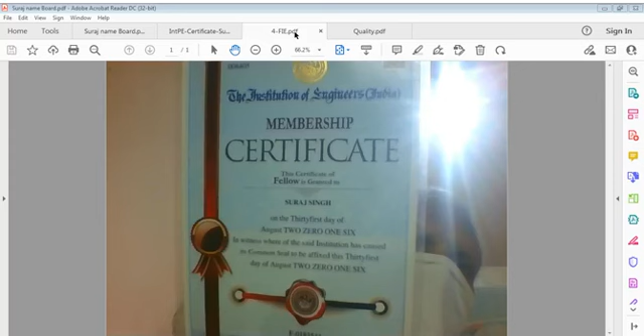Now it is about quality, about communication and coordination, which I usually talk of, because for me communication and coordination is very significant. It is very important to me that communication or coordination happens properly. We should be very concerned about communication and coordination issues everywhere, particularly in our professional domain.

I did not know what coordination was before, when I was young. The real meaning of coordination was not understood, though we used to do that. Nobody taught us about it. In our education system it was not included, but it is not necessary that it should be included, because the education system is well measured. Syllabus and program of education are well settled, you cannot expand or shorten them, because you have to learn the basics of education first, basic subjects.

Even in engineering, you do not become an engineer after passing your examination. Do we call this person an engineer? Of course, by education, by academics, one becomes an engineer, but it is dependent on engineering. You have to learn actually for a couple of years before that you become an engineer. In fact, you gain confidence, and to earn that confidence you have to work in the field.

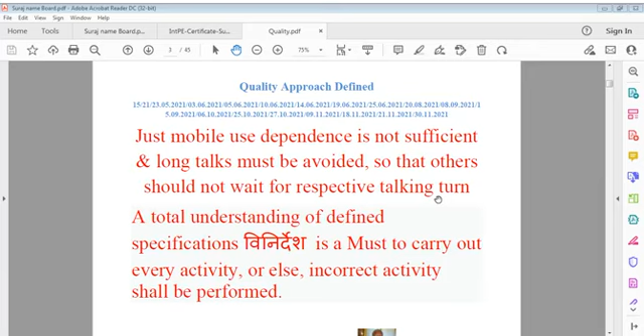We design specifications, we design systems, we design structures, and we design so much. Some people don't want to call them design, they want to call them specifications or something else. No problem - specification is also a part of design. Contract too is a part of design. Contract conditions too are part of designs. These are not ordinary designs, these are non-structural designs.

These designs move projects. If you don't have specifications, if you don't have contracts, we cannot move the project. That is also true, and moving a project is very significant, very paramount important. We can say technical activity cannot be done by talks. Technical activities cannot be done by signatures. Technical activity is done successfully and confirmed by real work.

This means if I learn something in my university, it must be done practically. And doing it practically is quite different than what I learned in the field. Therefore, quality can be defined completely differently. What was told, what was learned is not the same as what I do, because when we do something, we are exposed to the reality of work, the reality of organization, the reality of actual work.

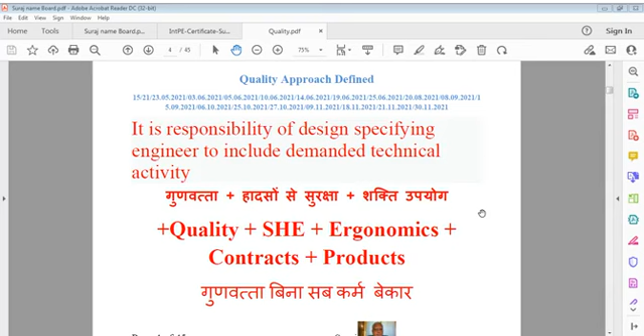And those may be linked to professional engineering or they may not be linked to professional engineering. Unfortunately, writing skill is not developed in our education. Coordination is not known - what is coordination? It does not coordinate, I'm not criticizing anyone. No need - when you work in the field, you shall know what coordination is. If you do not know coordination, if you do not conduct anything about communication, then you won't be a successful engineer. You cannot stay anywhere.

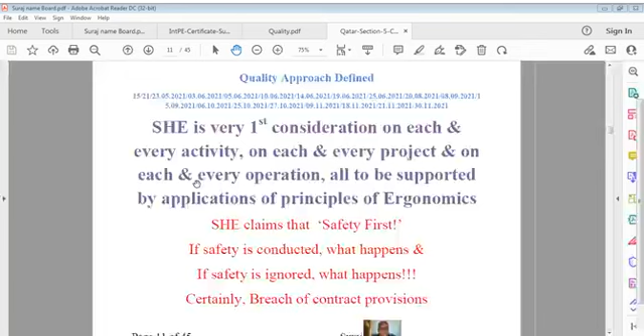In engineering, particularly in civil engineering, we all know that concrete is a prime element, a prime material. Without concrete material, generally we cannot survive. Concrete has become that part of our life that if concrete doesn't exist, our construction has got no meaning. It may be RCC construction, or structural steel, or pre-stressed concrete, whatever we can say, concrete is required in all works.

I discussed about it long back, and yesterday also I tried some pages. Concrete, you can say, is very much part of a contract, a very smart part, a very active part in every contract, in every project. And you can say a major part of every work, every project is concrete, because it is the body, it is the structure, the concrete structure we can say.

And if concrete fails, if your structure fails, every other part, every other content, every other article, every other material that is put on the structure goes away. If there is a failure in the structure, whatever you have put on that in form of finishes, in form of flooring, in form of walling, all those go away.

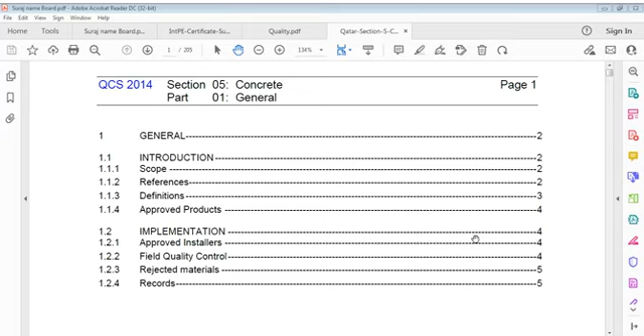Concrete is concrete, and therefore I want to share with you, as I shared before, why I consider this. This is not my document, this is not my print, this is another publication from another state. I have this copy, that's why I'm referring to it. I don't say that you must use this, maybe you have your own, but only for contents I try to project it, because it's better if you understand that.

In this, let's say, means it's a general part, and this is here. I will only give some brief, I'm not going to take at length. I have to do contracting, I have to do contract arbitration. We have many issues we have to discuss.

We have to discuss what is contract and what is arbitration, and why there is arbitration, or why there are disputes, what is the reason for that, where there are lapses on contracts, why there are lapses, why contracts are not clear. Because contract means agreement, and why there is error in agreement, why don't we understand what is fact and what is not fact.

Contract we generally don't consider our subject, but I think contract is much more a subject of engineering than some of the other fields. If there's no good contract, there's no good execution, no good work, no good design. So contracts are part of life, and it may not be taught well in our ordinary education, or it may be taught well, but we did not care, because it's very boring.

There's no mathematics in that. It's the fact that, just like mathematics, that's what I understand. Mathematics, formula, physics, or chemistry - likewise, we are full of this use of formula. We just apply formula and get answer. That's what we think is engineering design.

But I think contract, and how to operate contract, how to do contract - these are well related in construction engineering, at least. There is a contract, but contract doesn't mean contract only, it means all supporting documents, all structured documents. In contract there are so many documents, that's why I take this in title - Red, Silver, White.

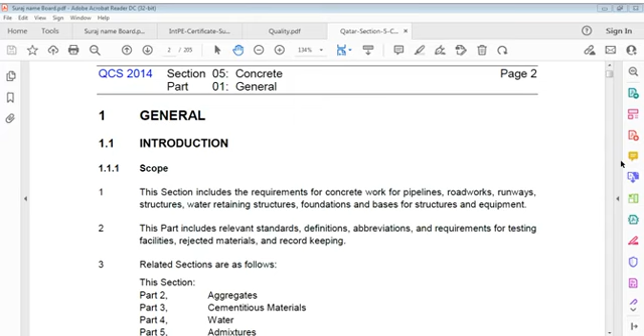And in this we say we have aggregates.

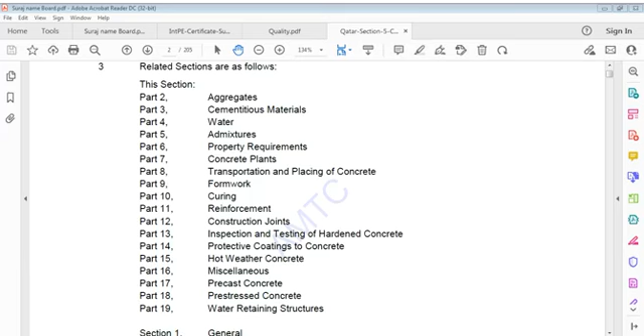Sections in this include general requirements, and of course quality requirements and controls, and of course structures, that's foundations and retaining structures, or road work, which is a different world, then drainage work, and some mechanical and electrical equipment.

And then we have some references from the American Society of Testing Material, that is standard practice for curing concrete, making and curing concrete test specimens, and of course method for compressive strength of cylindrical concrete specimens, and then test method for slump of hydraulic cement concrete and temperature of freshly mixed hydraulic cement.

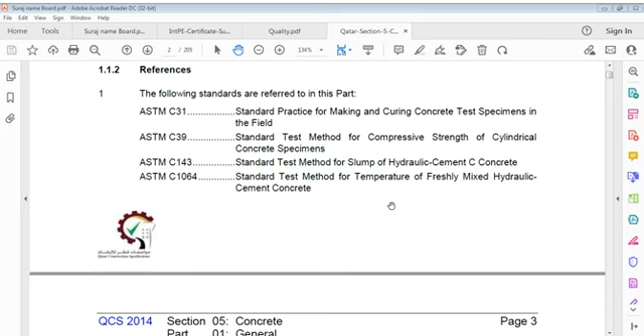All this, and civil engineering terms, some terms of glossary of buildings. We have to care about that.

Then test for general properties of aggregate, methods for sampling, and test for general properties of aggregates, methods for reducing laboratory samples. Then we have method of sampling fresh concrete on site. Then we have testing fresh concrete, that is slump test, shape, dimensions, and other requirements.

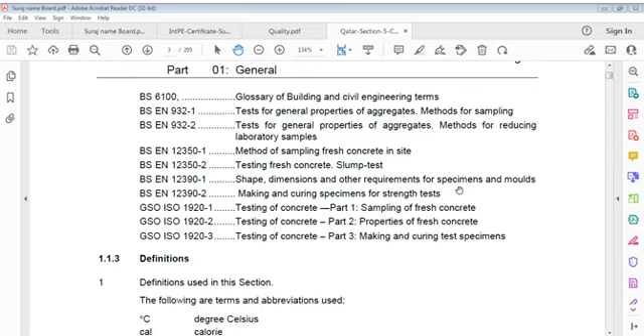Shape, dimensions, and the requirements. Of course we then have making and curing specimens for strength tests, and of course testing of concrete part 1, that's sampling of fresh concrete. Testing of concrete part 2 is properties of fresh concrete, and testing of concrete part 3 is making and curing test specimens. These are some from European codes, ISO, and some from British standards likewise.

You can see we have it like that. And then we have certain definitions of symbols, and these are very common. You know what this is.

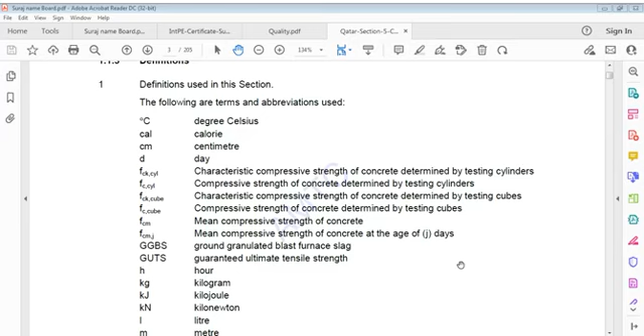For example, degree Celsius is degree Celsius degree, then cal is calorie, cm is centimeter, D is day, and FCK is cylinder, which clearly indicates compressive strength, that's characteristic compressive strength of concrete determined by testing cylinders, because cylinder is written there. Same way, FC CYL is compressive strength of concrete determined by testing cylinders. Then FCK simply says characteristic compressive strength of concrete determined by testing cubes. So basically, characteristic strength means of a cube.

And we can say FC cube is compressive strength of concrete determined by testing cubes, and of course FCM means compressive strength of concrete. Same way, FCK cube is characteristic compressive strength of concrete determined by testing cubes, and same way compressive strength of concrete determined by testing cubes. FCM means mean compressive strength of concrete, and FCM with J means compressive strength of concrete at the age of J days.

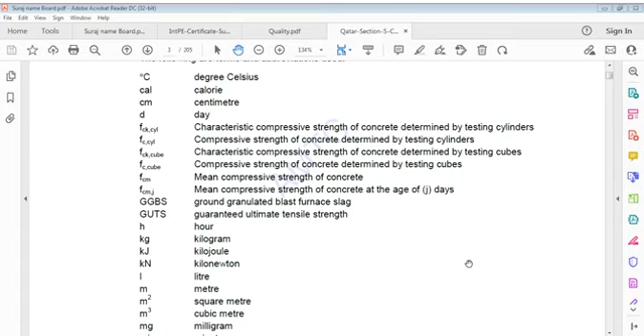And yes, you can also say here that GGBS is granulated blast furnace slag, and GUTS is guaranteed ultimate tensile strength.

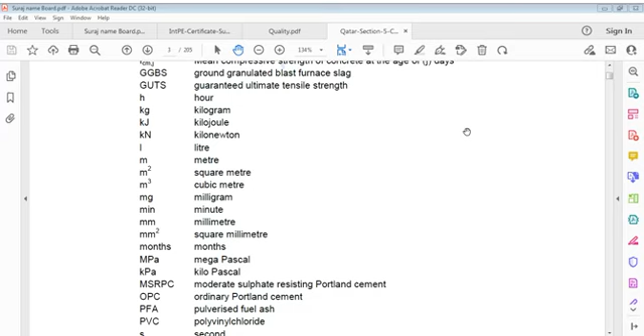H stands for hour, kg stands for kilogram, kJ stands for kilojoules, kN stands for kilonewton, L stands for liter, m stands for meter, m square stands for square meter, m cube is cubic meter, mg is milligram, min is minute, mm is millimeter, months is months, MPa is megapascal, and kPa is kilopascal. MSRPC means moderate sulfate resisting Portland cement, OPC is ordinary Portland cement, PFA is pulverized fuel ash, and PVC is polyvinyl chloride.

S is equal to second, SF is equal to silica fumes, SRPC is sulfate resisting Portland cement, ton is 1000 kilogram as everybody knows, ppm is part per million, micron is 10 to the power minus 6 meter, and micrometer is also 10 to the power minus 6 meter.

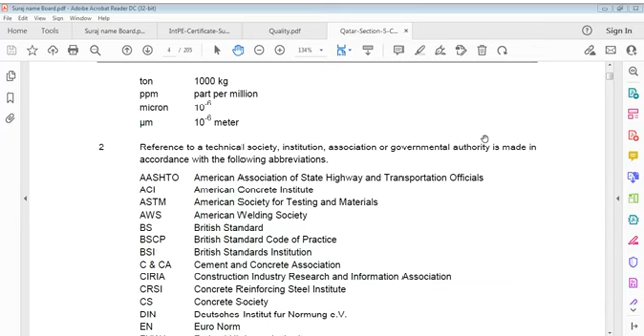In that case, we go to reference to technical society, institutions, associations, or government authority. These are only for information, I'm not saying we have to remember them. AASHTO is American Association of State Highway and Transportation Officials.

They have American Welding Society, AWS, as well as BS, the British Standard, and BSCP, British Standard Code of Practice. Likewise, we have so many others.

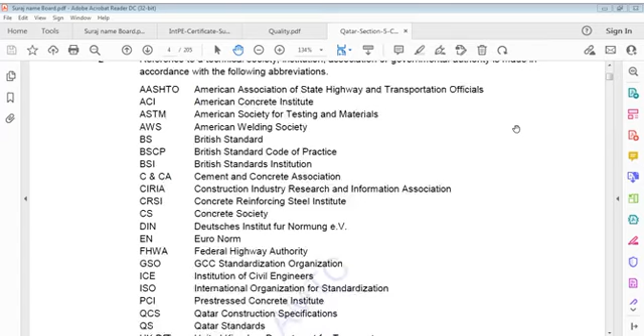We have C&CA, that is Cement and Concrete Association. CIRIA, that's very famous, is Construction Industry Research and Information Association.

Then we have Concrete Reinforcing Steel Institute, CRSI, and CS, Concrete Society.

EN is Euro norm, and FHWA is Federal Highway Authority. GSO is the GCC Standardization Organization, and GCC is Gulf Cooperation Council, the Gulf Countries Council. ICE is Institution of Civil Engineers, and ISO is International Organization for Standardization.

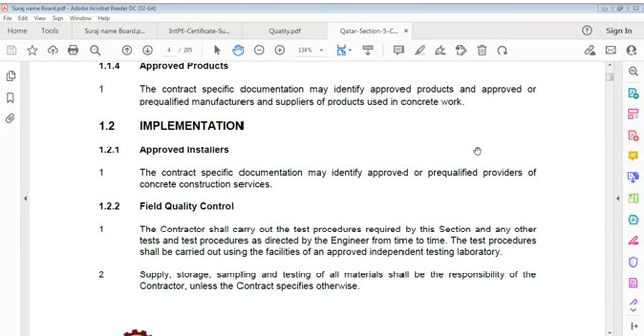Field quality control: contractors shall carry out test procedures required by this section and whatever other tests and test procedures as directed by the engineer from time to time. Test procedures shall be carried out using facilities of an approved independent testing laboratory.

So contractors shall carry out test procedures required by this section and whatever other tests and test procedures as directed by engineer from time to time. Test procedures shall be carried out using facilities of an approved independent testing laboratory.

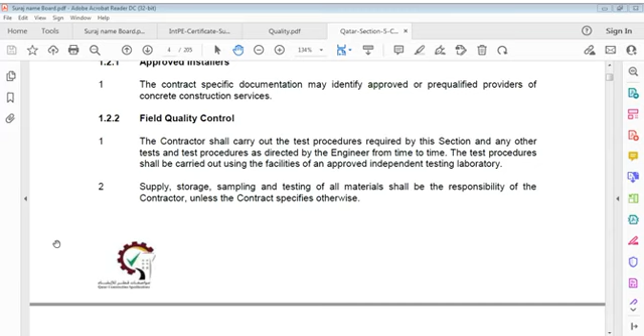The engineer can also require the contractor to take samples of materials and deliver them to the Central Materials Laboratory for additional tests to be carried out by the employer. Sampling procedures shall be in accordance with BS EN 932 or relevant ASTM standards, and sample sizes shall conform to the requirements shown in table 1.1.

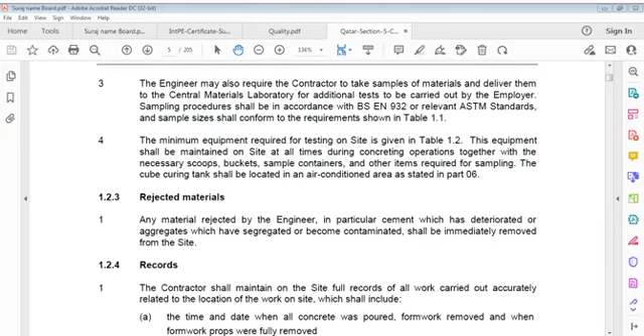Sample sizes shall conform to requirements. What is required? Material, sampling procedure, test, and minimum sample size. The materials are cement, aggregate, reinforcement, and water.

For cement, the test is full range of tests, and the sample is 7 kilogram, which should be taken from 12 bags, for the full range of tests.

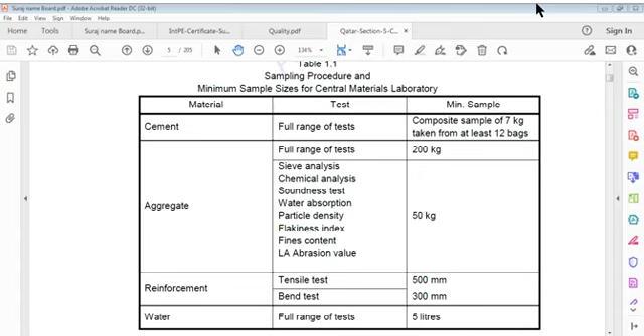We have aggregate, both aggregates, and for this we take samples of 200 kilogram. Out of this 200 kilogram, we have to conduct sieve analysis, chemical analysis, soundness test, and water absorption. These are very important tests: sieve analysis, chemical analysis, soundness test, water absorption test, particle density, flakiness index, fines content, and Los Angeles abrasion value.

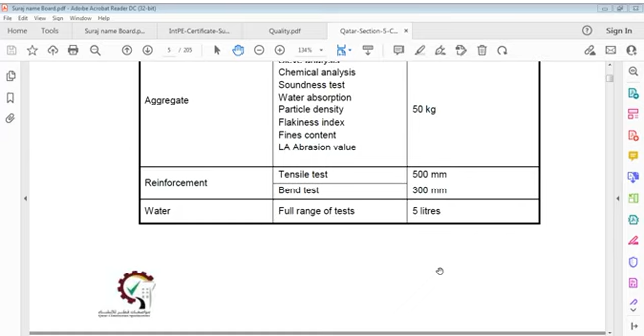Equipment, the minimum equipment required for testing on site, is given in the table.

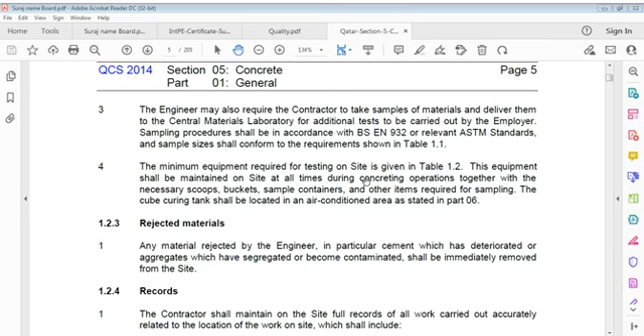Here we have the sampling procedure. In accordance with this, the engineer may also require the contractor to take samples of materials and deliver them to a central laboratory for additional tests to be carried out by the employer. Sampling procedure shall be in accordance with BS EN 932 or relevant ASTM standards, and sample sizes shall conform to the requirements in Table 1.1.

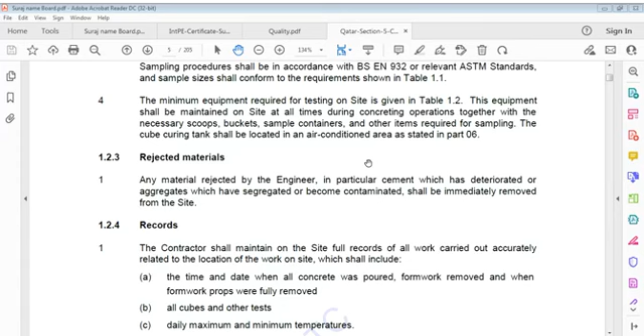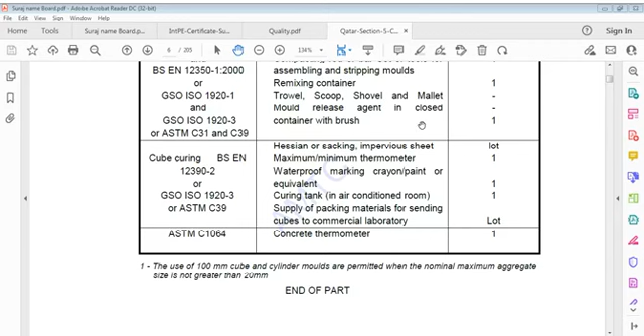And then we have the curing tank, supply of packing material for sending cubes to the commercial laboratory, and concrete thermometer.

Then we move to aggregates, and what we actually need to cover: general scope, references, definitions, source approval, sampling, quality and testing, storage at contractor's place, plant, fine aggregate for concrete and mortar, coarse aggregate for concrete, combined aggregate for concrete, washing and processing, lightweight aggregates, and coarse recycled aggregates.

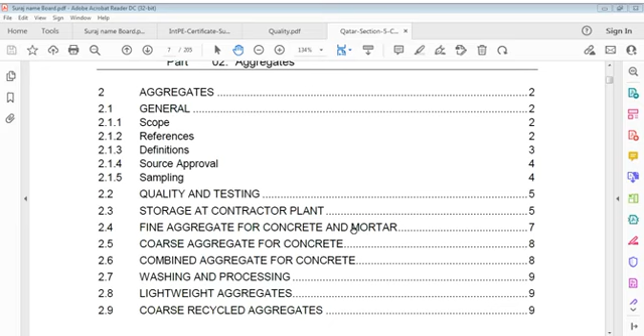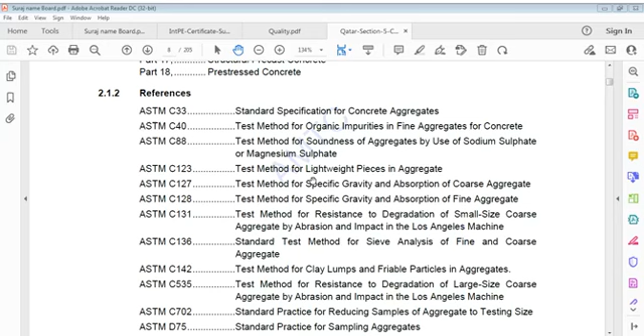Then test method for lightweight pieces in aggregate. And then test method for specific gravity and absorption of coarse aggregate. We can say specific gravity. Then test method for sieve analysis, or resistance to degradation of small size coarse aggregate by abrasion and impact in the Los Angeles machine. That's very important: resistance to degradation of small size coarse aggregate by abrasion and impact in the Los Angeles machine.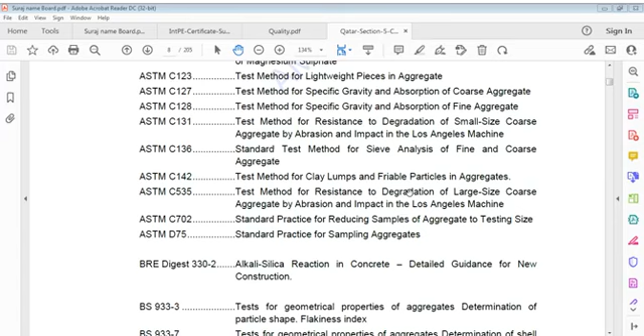When we are talking of tests, we discussed Los Angeles, then we have sieve analysis of fine and coarse aggregate, and clay lumps and friable particles in aggregate. Then we have the method of resistance to degradation of large size coarse aggregate by abrasion and impact in the Los Angeles machine. Then standard practice for reducing samples of aggregate to testing size, and standard practice for sampling aggregate.

Then we have certain documents, BRE Digest, that is alkali-silica reaction in concrete: detailed guidance for new construction. And we have tests for geometrical properties of aggregates, that is determination of particle shape, the flakiness index, and tests for geometrical properties of aggregates for determination of shell content, percentage of shells or shell content.

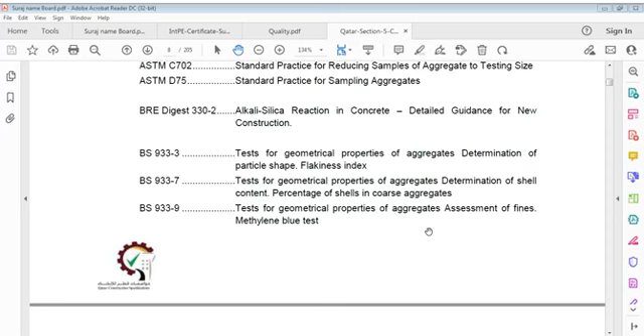After geometrical properties, we have tests for geometrical properties of aggregates, determination of shell content, percentage of shells in coarse aggregate. Then we have classification test for constituents of coarse recycled aggregate, and mechanical and physical properties of aggregate, determination of particle density and water absorption.

Then we have complementary standards, specifications for constituent materials and concrete, and aggregates for concrete. Chemical properties of aggregate include chemical analysis, determination of acid soluble chlorides and salts, and then tests for thermal and weathering properties.

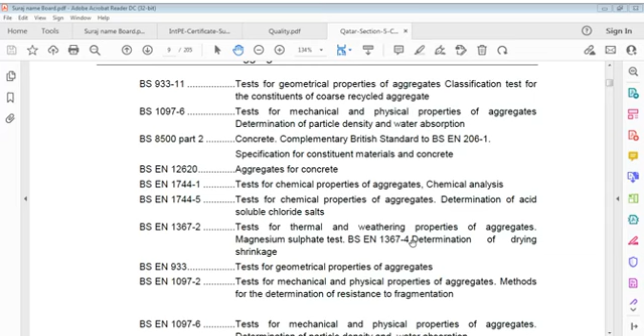We have British standards and specifications for constituent materials and concrete aggregates for concrete, and chemical properties of aggregate, determination of acid soluble chlorides, and thermal and weathering properties like magnesium sulfate test, determination of drying shrinkage, geometrical properties of aggregate, and tests for mechanical and physical properties including methods for determination of resistance to fragmentation.

Test for mechanical and physical properties of aggregate, determination of particle density and water absorption. We have lightweight aggregate for concrete, mortar and grout. We have aggregates for concrete, and guidance to use BSEN 12620. Then lightweight aggregate for concrete, mortar and grout, and guidance to use of BS EN 13055-1.

Mortar and specification for masonry mortar. Then we have quality system, that is management system requirements, ISO 9001-2008, now it's 2015, and ISO 17025, required for competence of testing and calibration laboratories.

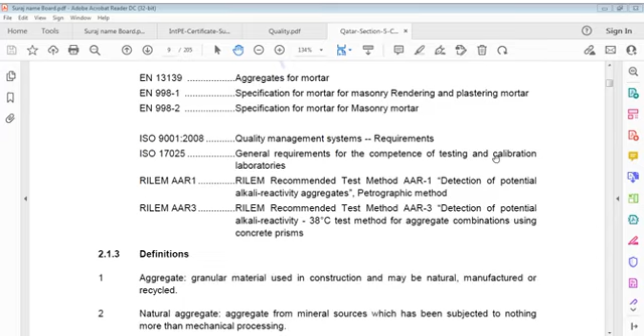In definitions we have: what is aggregate? That's a very interesting one. Granular material used in construction, which may be natural, manufactured or recycled.

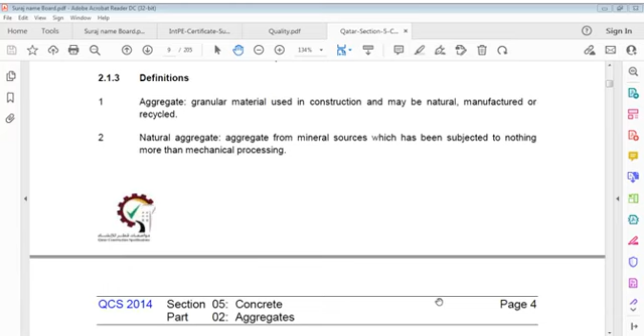How is natural aggregate defined? Aggregate from mineral sources which has been subject to nothing more than mechanical processing. Manufactured aggregate is aggregate of mineral origin resulting from an industrial process involving thermal or other modifications. Recycled aggregate is aggregate resulting from processing of inorganic material previously used in construction. Lightweight aggregate is of mineral origin having a particle density not exceeding 2000 kg per cubic meter or a loose bulk density not exceeding 1200 kg per cubic meter.

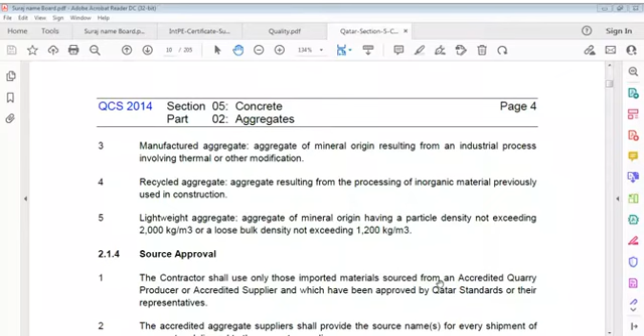Recycled aggregate and lightweight aggregate. So we have here sources, source approval. Source means, you know, from where we get that aggregate.

You can say contractor shall use only those imported material sources from accredited, qualified, registered quarry - you can call it accreditation. Contractor shall use only those imported materials sourced from an accredited quarry, producer, or accredited supplier which have been approved by Qatar Standards or their representative.

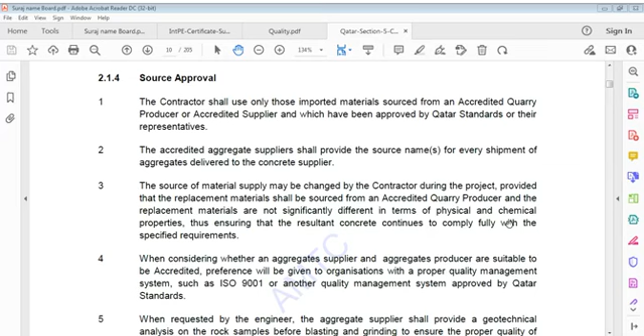So you can say this is a quality approach. Accredited aggregate supplier shall provide source name for every shipment of aggregates that are not significantly different in terms of physical and chemical properties, thus ensuring that resultant concrete continues to comply fully with specified requirements.

Producers are suitable to be accredited. Preference will be given to organizations with a proper quality management system, such as ISO 9001 or another one.

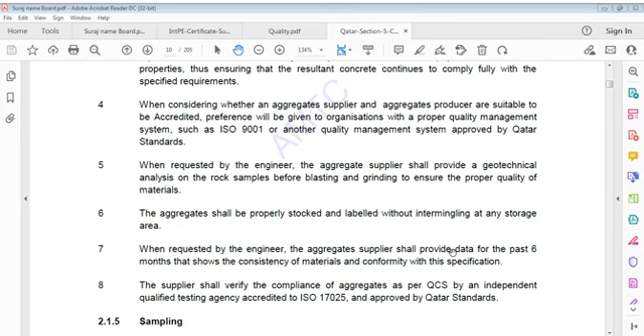When considering whether an aggregate supplier or aggregate producer is suitable to be accredited, preference will be given to organizations with a proper quality management system, such as ISO 9001 or another quality management system approved by standards. When requested by engineers, aggregate supplier shall provide a geotechnical analysis on rock samples before blasting and grinding to ensure proper quality of material.

Aggregate shall be properly stocked and labeled without intermingling at any storage area. When requested by engineer, aggregate supplier shall provide data for past 6 months.

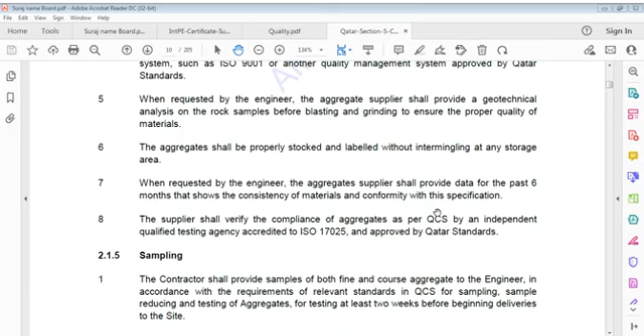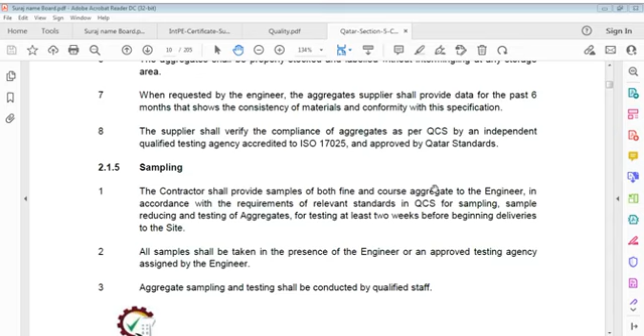Consistency of materials and conformity with specification - suppliers shall verify compliance of aggregates according to specifications by an independent qualified testing agency accredited to ISO 17025, that is compliance of aggregates to ISO 17025, and approved by standards. And then sampling.

Sampling by contractors: contractor shall provide samples to engineer in accordance with requirements of relevant standards in QCS for sampling, sample reducing and testing of aggregate, for testing at least 2 weeks before beginning deliveries to site.

So this is about sampling, how to sample. First, provide samples for both aggregates, that is coarse and fine, to engineer, in accordance with standards requirements for sampling and sample reducing and testing of aggregate, for testing at least 2 weeks before beginning deliveries to site. These samples shall be taken in presence of engineer or an approved testing agency assigned by engineer. Aggregate sampling and testing shall be...

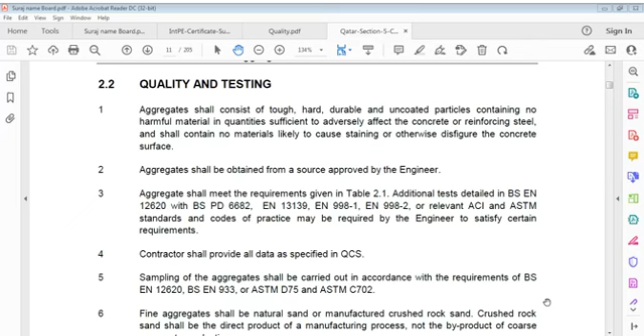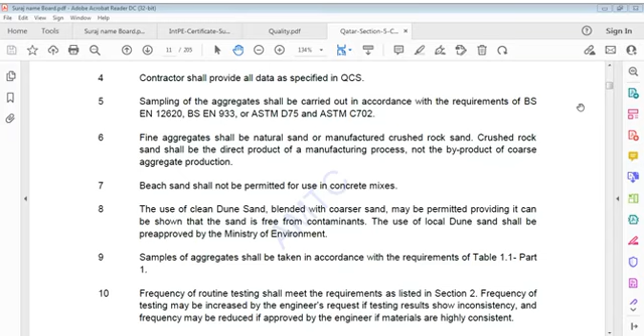Contractor shall provide fine aggregate in accordance with requirements of BSEN. Fine aggregate shall be natural sand or manufactured crushed rock sand, and crushed rock sand shall be a direct product of a manufacturing process, not a byproduct of coarse aggregate production. Beach sand shall not be permitted for use in concrete mixes.

Use of clean dune sand blended with coarser sand may be permitted.

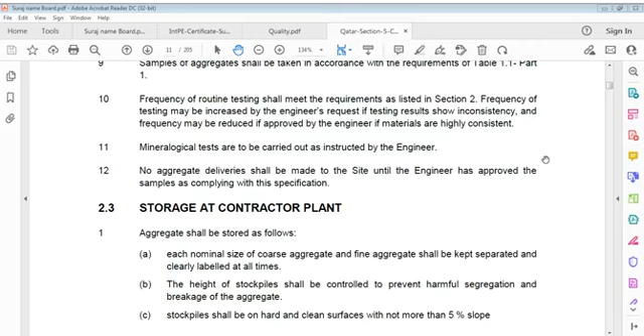Storage at contractor's plant: aggregate shall be stored as follows. Each nominal size of coarse aggregate and fine aggregate shall be kept separated and clearly labeled at all times. Height of stockpiles shall be controlled to prevent harmful segregation and breakage of aggregate.

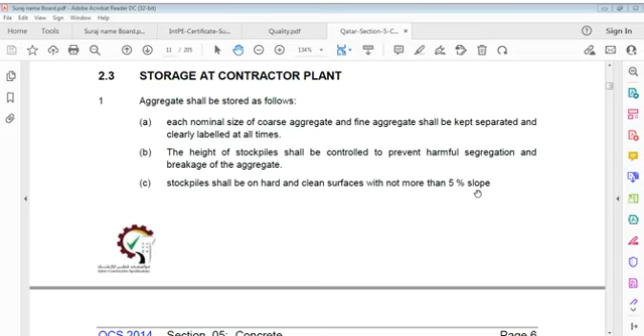Stockpiles shall be on hard and clean surfaces, with not more than 5% slope. 5% means 5 in 100, that is 1 in 20.

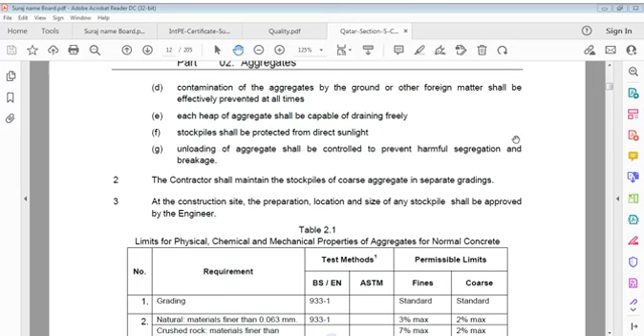What is aggregate in normal concrete? I will be back in a couple of minutes. Meanwhile, you can just have a word on this. A couple of minutes for me, and I'll come back.

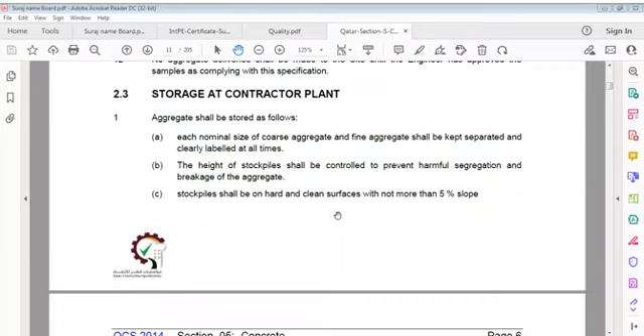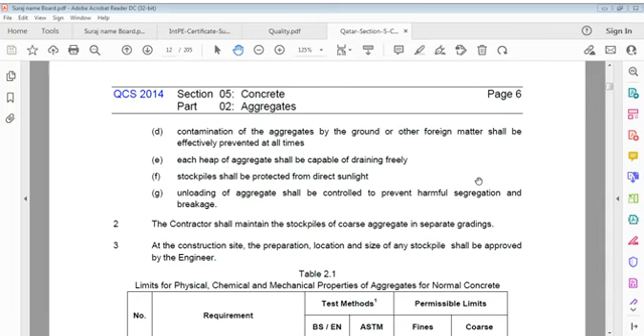Every size should be separately stocked. Height of stock should be controlled to prevent harmful segregation and breakage of aggregate. Stockpile should not be more than 5% slope, and contamination of aggregate by ground or other foreign matter shall be effectively prevented at all times. Each heap of aggregate shall be capable of draining freely. Stockpile shall be protected from direct sunlight.

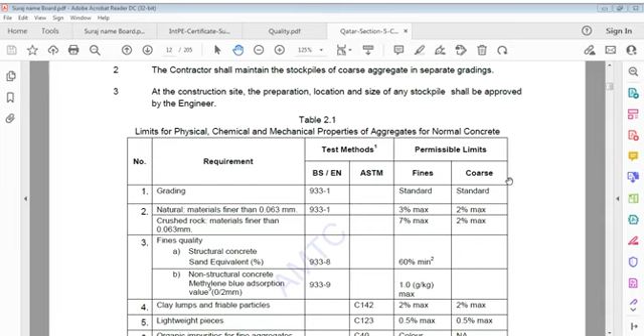Unloading of aggregate shall be controlled to prevent harmful segregation and breakage. Contractor shall maintain stockpiles in coarse aggregate in separate gradings. At the construction site, preparation, location, and size of whatever stockpile shall be approved by the engineer.

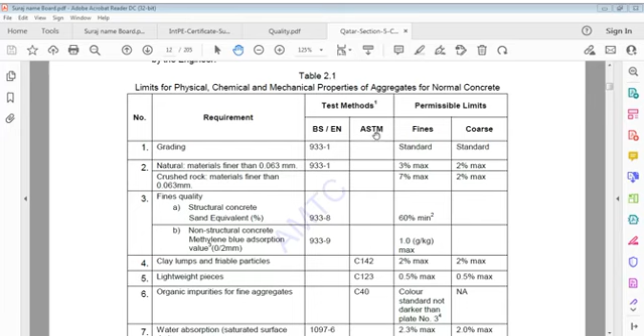Now there is a table, table 2.1. It gives limits of physical, chemical, and mechanical properties of aggregates for normal concrete. This table has serial number, requirement, test methods which are BSEN or ASTM, and permissible limits for fines and coarse. It's here, and we can start.

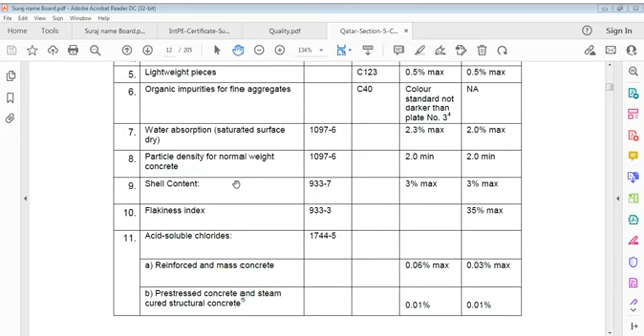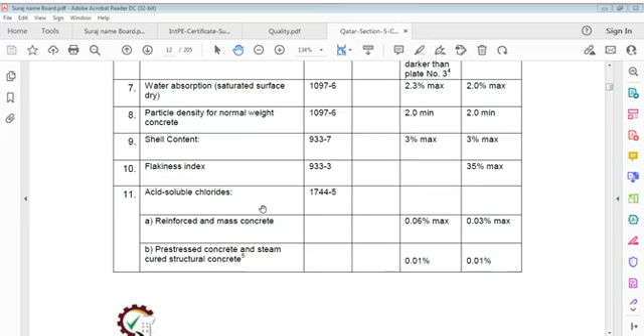Grading is number one. Here the requirement is grading, then natural materials fine. Then there is clay lumps and friable particles, lightweight pieces, organic impurities for fine aggregate, water absorption, then particle density for normal weight, shell content, flakiness index, acid soluble chlorides in reinforced and mass concrete and pre-stressed concrete steam cured. Magnesium sulfate resistance to fragmentation, that is Los Angeles abrasion, drying shrinkage, and potential reactivity.

In this, grading is number 1 here. BS is 933-1. Its fines and permissible limits, fines standard and coarse standard. And we have natural materials finer than 0.063 mm. BS 933-1. In this, permissible limits for fine is 3% maximum, and 2% maximum for coarse.

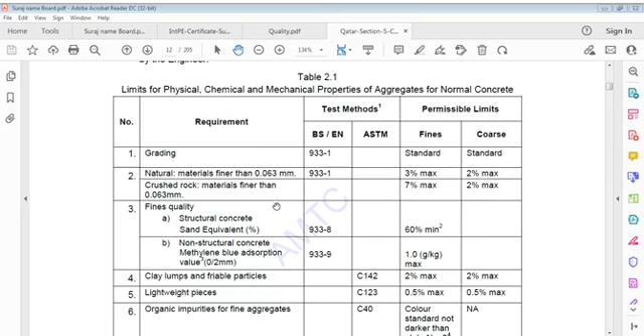Clay lumps and friable particles. ASTM C142. Permissible limit is 2% maximum for clay lumps and friable particles, and coarse is 2% maximum. That is 0.5% maximum in fine and 0.5%.

C40 it is. Organic impurities for fine aggregates. Color standard not darker than plate number 3. Plate number, maybe there's a reference, we'll check. Color standard not darker than this one. And in coarse it's not applicable. This means that organic impurities give color to the material.

Water absorption, saturated surface dry, that is BS 1097-6. Water absorption is 2.3% maximum in fine and 2% maximum in coarse.

Particle density for normal weight concrete, BS 1097-6, 2 minimum.

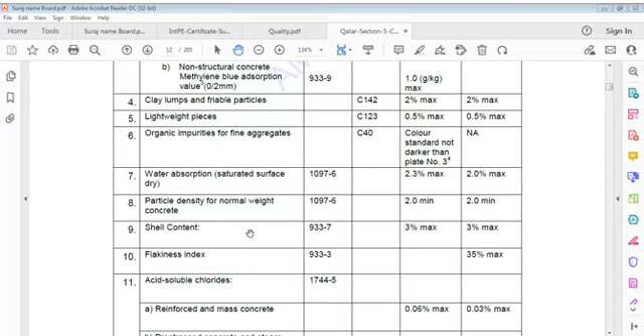Shell content, BS 933-7. In fine it is 3% maximum, and per 933.3, in coarse it is 35% maximum. When I worked in Qatar it was 25%, I think 15% at one time. In 1986 it was 15%, but it was a great impossibility, so they increased it to 25%, and now it's given as 35%, so it's quite good. I think this is comfortable because of many other replacements.

Acid soluble chloride, BS 1744-5. In case of reinforced and mass concrete, fines 0.06% maximum acid soluble chlorides, and for coarse 0.03% maximum. Pre-stressed concrete and steam cured structural concrete, 0.01% acid soluble chlorides for fines.

Surface sulfate, acid soluble sulfate. Test method is BS 1744-1. Fines are 0.4% maximum acid soluble sulfates and coarse is 0.3% maximum.

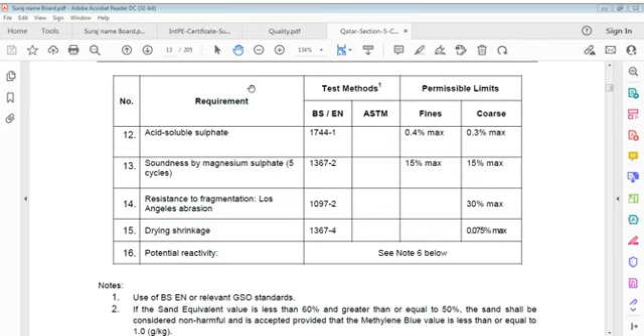BSEN or relevant standard, that is GSO, Gulf Standard Organization standards. If sand equivalent value is less than 60% and greater than or equal to 50%, sand shall be considered non-harmful. If sand equivalent value lies between 50% and 60%, sand shall be...

Methylene blue values less than or equal to 1 gram per kilogram. Not required when fines content in fine aggregate or in all-in aggregate is 3% or less.

In organic impurities, use of fine aggregate failing in test is not prohibited, provided that discoloration is due principally to the presence of small quantities of coal, lignite, or similar discrete particles.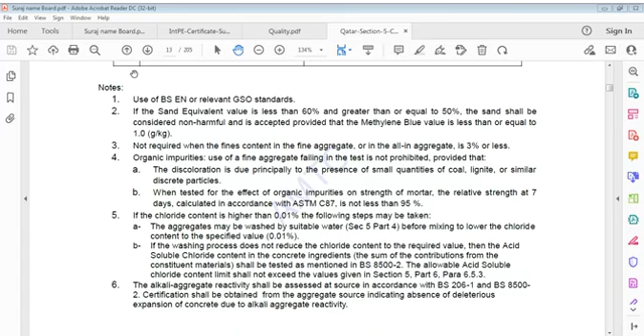If chloride content is higher than 0.01%, if aggregate content is higher than 0.01%, the following steps may be taken: aggregates may be washed by suitable water before mixing to lower chloride content to the specified value of 0.01. If the washing process does not reduce chloride content to the required value, acid soluble chloride content in concrete ingredients shall be tested as mentioned in BS 8500-2.

Allowable acid soluble chloride content limit shall not exceed the value given in section 5, part 6, para 6.5.3. Alkali aggregate reactivity shall be assessed at source in accordance with BS 206-1 and BS 8500-2. Certification shall be obtained from the aggregate source indicating absence of deleterious expansion of concrete due to alkali aggregate reactivity.

So this is another topic, fine aggregate for concrete and more. We'll see that now. This is all here.

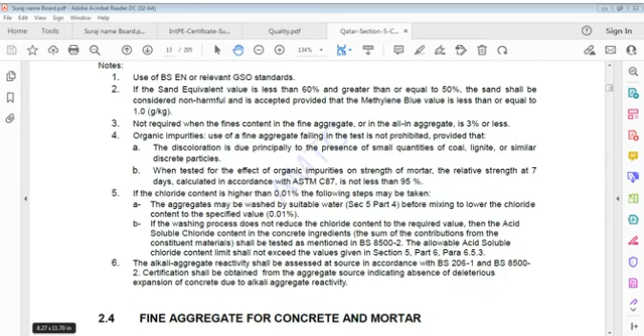Concrete mortar fine aggregate consists of natural clean sand, stone screenings, or a combination, and can be produced from natural disintegration of rock or gravel, or by crushing of rock or gravel, or processing of manufactured or artificial aggregate conforming to requirements of physical and chemical properties, complying with Table 2.1, and subject to engineer's acceptance.

Crushed fine aggregates may be blended with local washed sand, provided that the final aggregate complies with the requirement of Table 2.1. We'll see what Table 2.1 is. Gradation of fine aggregate for concrete and mortar shall be in accordance with gradation designation BS EN 12620 with BS PD 6682, EN 13139, EN 998-1, EN 998-2, and relevant ACI and ASTM standards and codes.

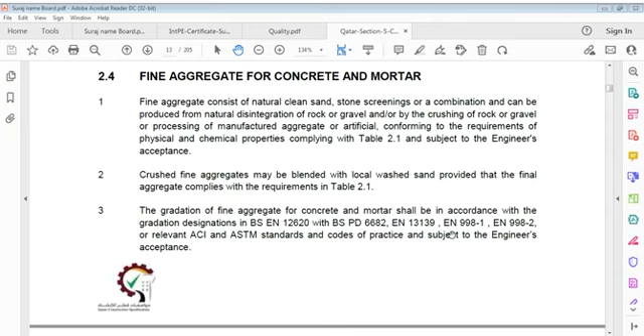Each batch of aggregate will be kept separate from previous batches and stored, and it may be mechanically washed to remove salts and other impurities in order to meet specified requirements.

Storage area for clean washed sand shall be shaded from direct rays of sun and screened for protection from dust. Area in the neighborhood of the stockpile mixing plant shall be watered as necessary to reduce rising of dust.

Use of dune sand shall be accepted as governed by regulations of Qatar Ministry of Environment, and shall not be used for any reinforced concrete; it is used only for blocks, block mortar, plasters, soil cement, shotcrete, and insulation.

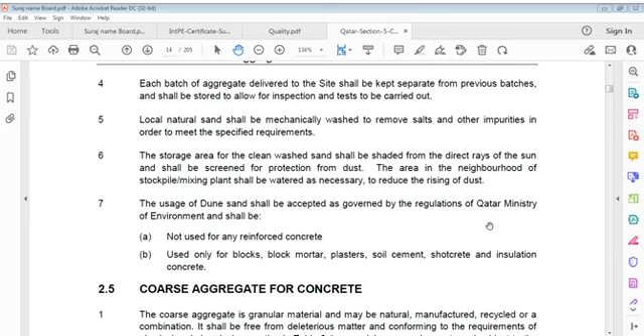Let's see, fine aggregate consists of natural clean sand and stone screenings, or a combination, and can be produced from natural disintegration of rock or gravel, or by crushing of rock or gravel, or processing of manufactured or artificial aggregate conforming to requirements of physical and chemical properties.

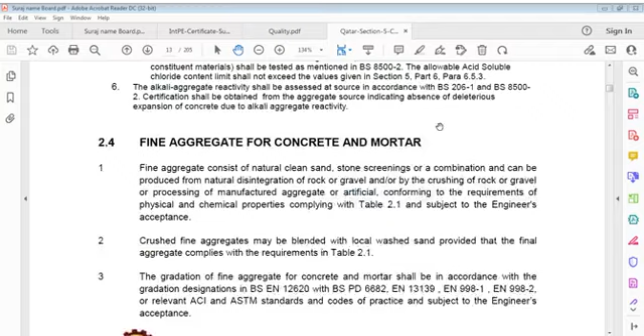Well, this will take time because we have to go very slow in this. As quality is what we are talking of, we have to understand everything clearly. Only then can we say what is quality. We cannot rush through leaving everything behind, and therefore it is...

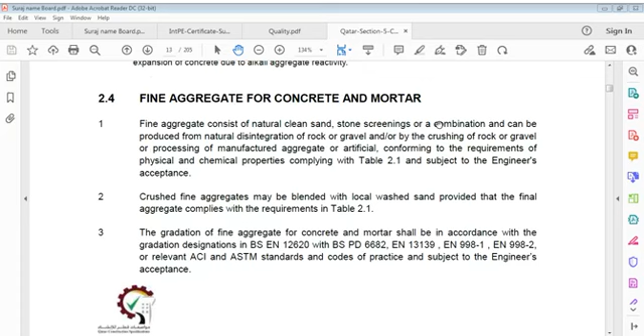This is the heart of engineering work, or you may say most of site works, most of concrete. Then we have to go through combined aggregate for concrete, washing and processing lightweight aggregates, coarse recycled aggregates, and then we have to see Table 2.2. This is here. Table 2.1 was there, I think.

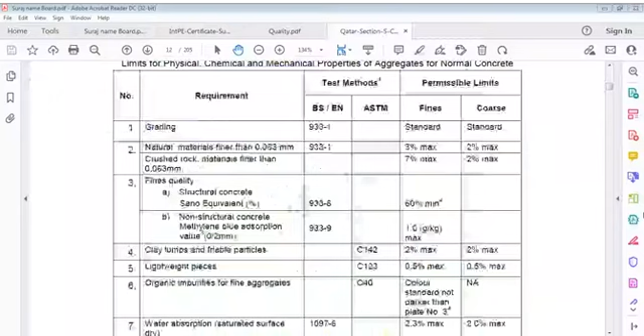I think this is 2.1. Is it? Let me see. Yes, it is 2.1. We are talking there, in which we have gone through limits of physical properties.

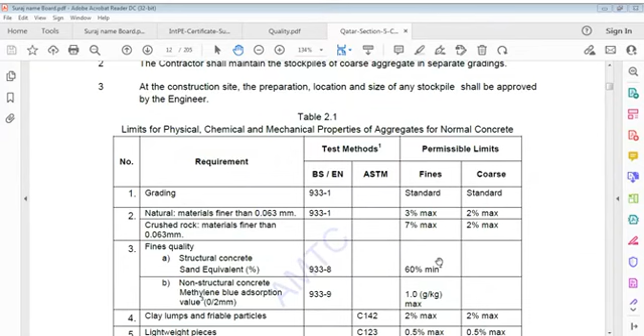Aggregate and coarse recycled aggregate, we have to see what that is. Of course, then requirements for coarse recycled aggregates and coarse RA mass fractions, and then, we can say, end of this part.

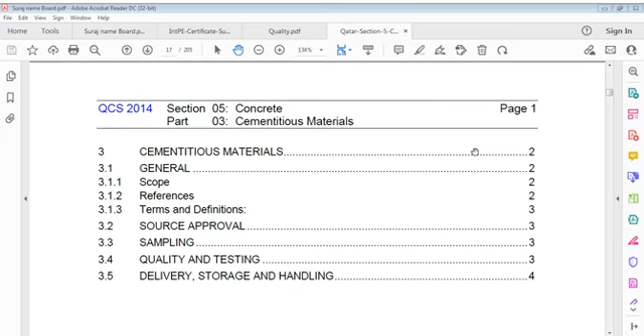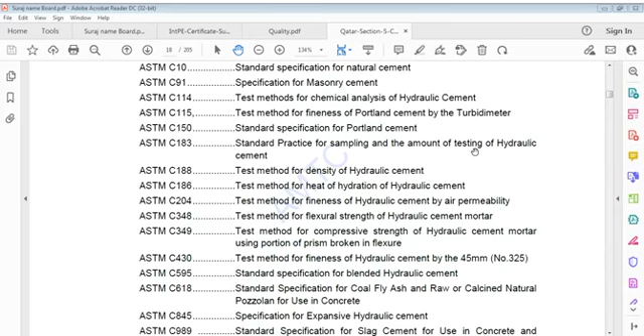Then concrete cementitious materials starts after this, which is also an interesting one, because cementitious materials, PFA, etc., we have to run very fast on this. It's a very complicated and very good, knowledgeable subject specification.

I want to share this with you because this is well done, deeply worked by these people. We have to understand facts. We are going to do quality work. We have to understand contracts, and we have to understand specifications. And of course, then contract specifications.

They have to upgrade knowledge, and also designers, this topic, this specification, systems that quality has - every designer is required to know it. It is not only in the interest of the designer, but also in the interest of designs.

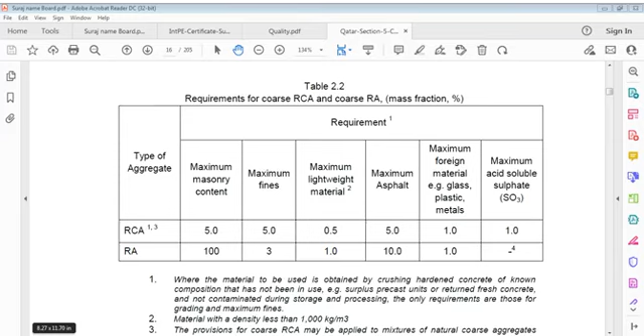There's no way out. It must be brought to that level.

Quality is soul of material, soul of product. And when we refer to civil construction product, these are very expensive, voluminous, and these have to work or serve for many decades to come. That is difference between construction products and other products. Construction product always heavy - cost wise, time wise, activity wise, or whatever other factor involved, that wise. Other engineering branches do not weigh heavy because no machine can work for 50 years.